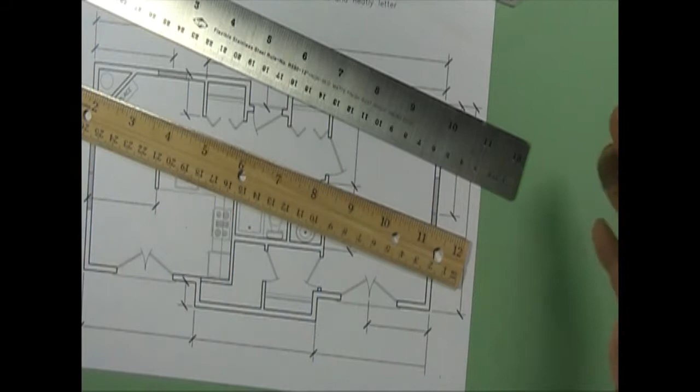Okay, this video is going to be an introduction to the fractional ruler and how to read that. There will be some resources in Blackboard for you to use to practice and get a little deeper understanding that you can read through. But what I've got here in front of me is a typical wood ruler that's got inches on one side and millimeters on the other side.

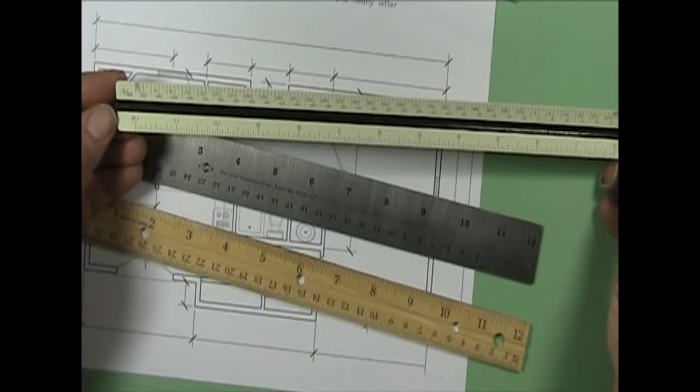Then I have a steel rule, which I'll talk about again in a little bit. It's inches and millimeters. I've got a couple of others over here. This one is an architectural scale, and I'll explain that in the architectural scale video, but it's a scale, not a ruler. And then here I have an engineer scale or a decimal scale.

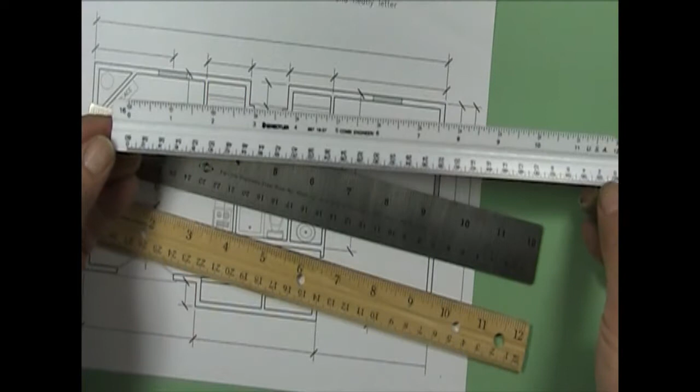And then there's a combination engineering scale, which has fractions of an inch, a couple of engineer scales, a couple of architectural scales, and sizes, you know, full size and half size. So that's some of the things that are available. I don't know which one will show it best. I think the wood is probably going to show the best, but as you can see, a typical ruler is divided into 12 inches. Okay, let me zoom in a little bit.

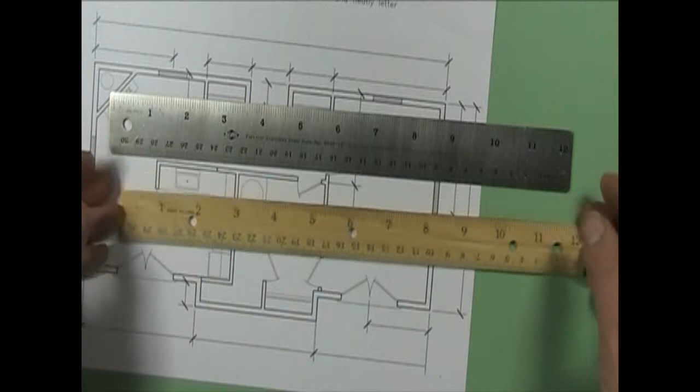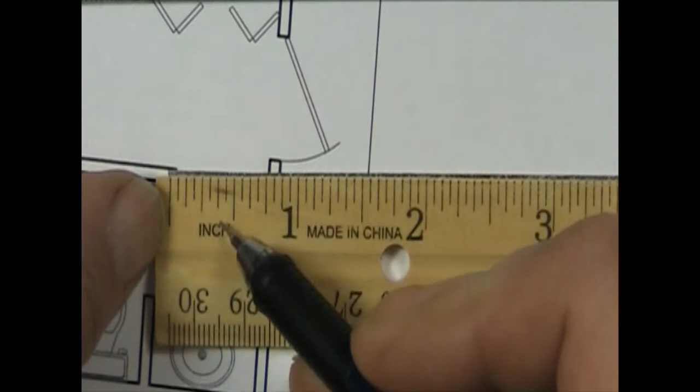All right, so you can see the wood ruler here. The line is the 0 point. Then we've got the 1 inch here, and it is divided in half, and then divided in fourths. Again, notice the length of the lines. And then the fourths are divided into eighths, and then the smallest unit is 1/16 inch. So you can count the tick marks by 16ths. 16 would get you to 1 inch.

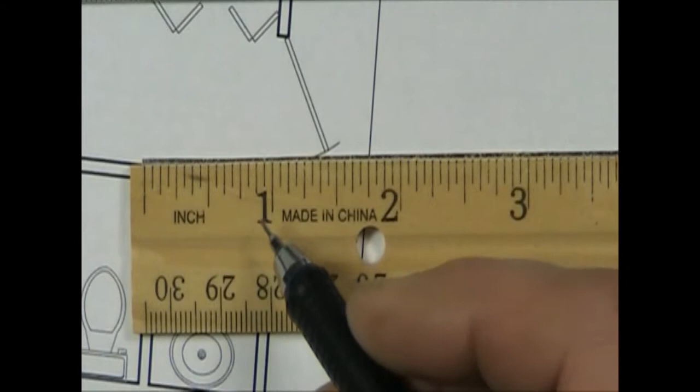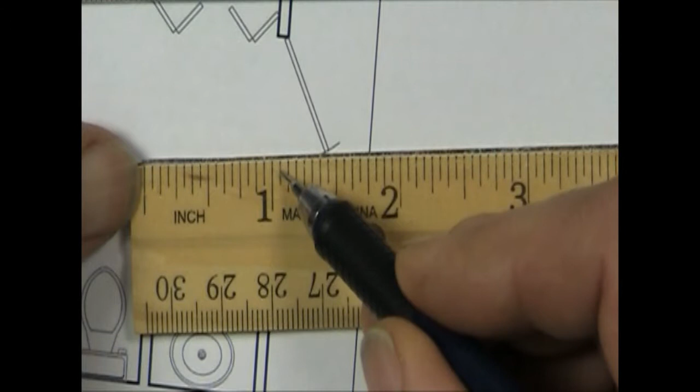But anytime you measure or record or write or dimension something, you always want to simplify your fraction down to the lowest denominator. So this measurement would be a half inch. It's 8/16, but we would write it as 1/2. Once we go beyond the 1 inch, then we would say 1 and 1/16, or 1 and 1/8. Now, most of the rulers you'll see will be divided into 16ths.

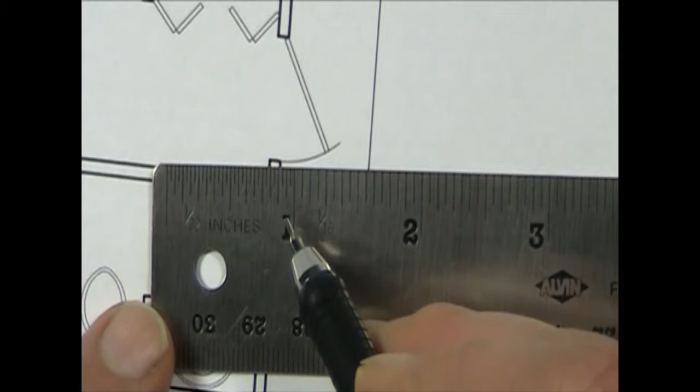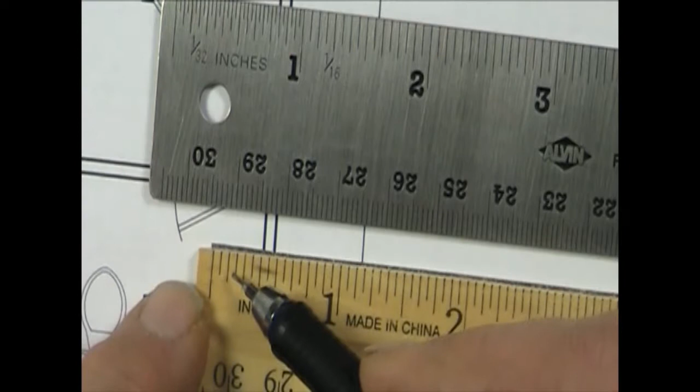The steel rule is actually divided into 32nds, and it will say that on the end. Everything else is in 16ths, but the first inch and the last inch on the other end are divided into 32nds, and some are even divided into 64ths. See if you can see that right there. So you can measure accurately with that. With a 16th, 1/16 is as accurate as you can measure. Anything less than that, a 32nd, you're having to guess or estimate.

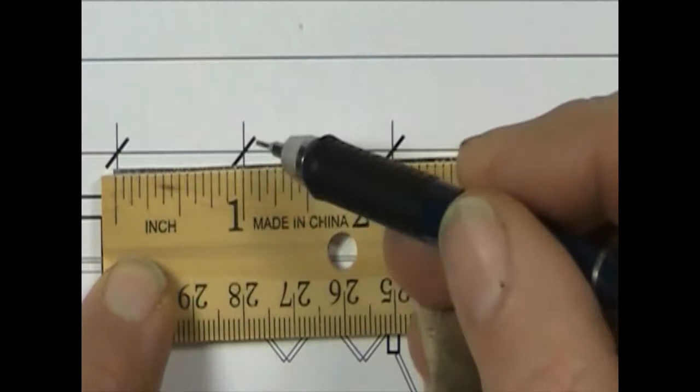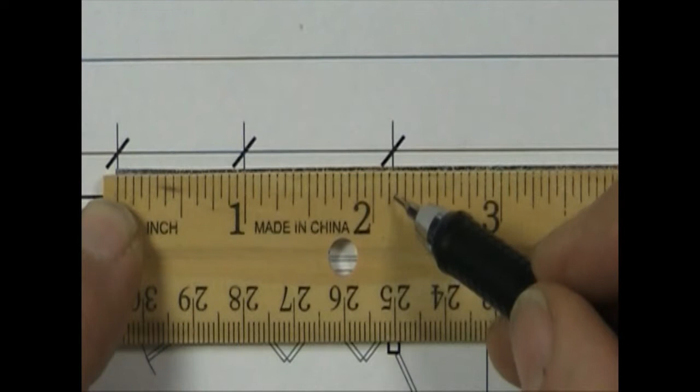All right, so just to demonstrate how some of these are going to work, I've got a little floor plan here, and I'm just going to measure it in inches. So I would line my 0 up with the mark and read out, and that reads 1 inch. If I were to measure from this point down to here, now I'm reading 2, and it looks like a little bit over 1/8 of an inch. So we could round that, depending on which way we're rounding, to 2 and 1/8.

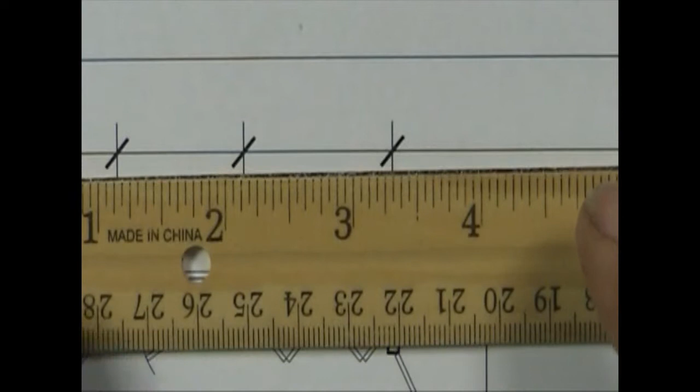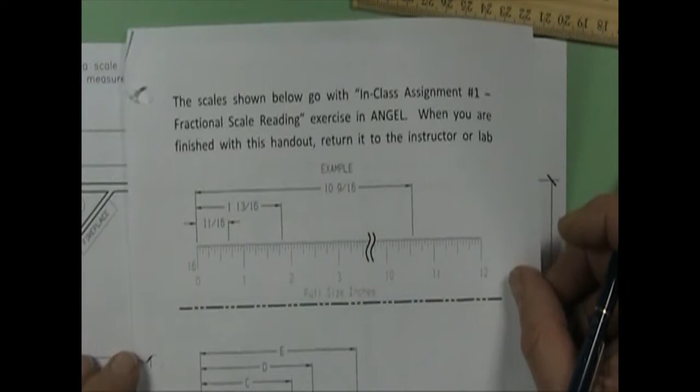If I pull back to this one, well, you can't see my 0 mark over there, but then I read this, and now we're looking at 3 and 1, 2, 3, 4, 5/16. Okay, now in the lab, once you've practiced, you're going to get this handout sheet, and this will be tied to Blackboard, even though it says Angel up here. You'll enter your answers in Blackboard, and the ruler at the top is not to scale. So you can't measure these with a ruler, because the printing is a smaller scale, so it's not life size. You just have to read that.

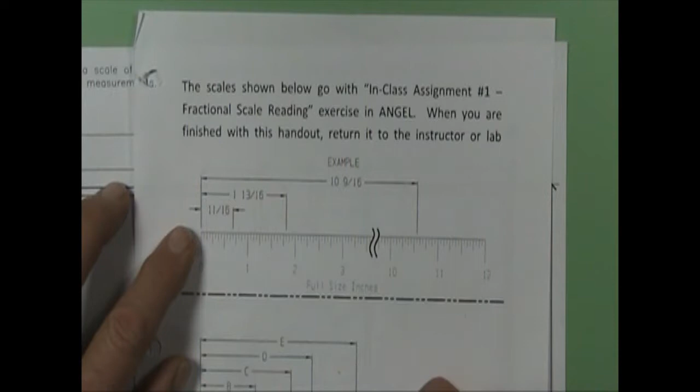So the example here is 11/16. If you were to count the tick marks, 1, 2, 3, 4, 5, 6, 11. So that would be your answer. This one, 1 and 13/16. And I'll go ahead and tell you, this one here is not on a 16th, it's on an 1/8 mark. And if you do not simplify your answer to 1/8, then your answer will be incorrect.

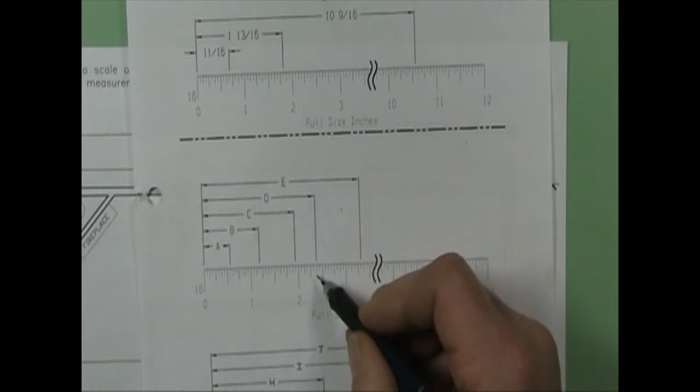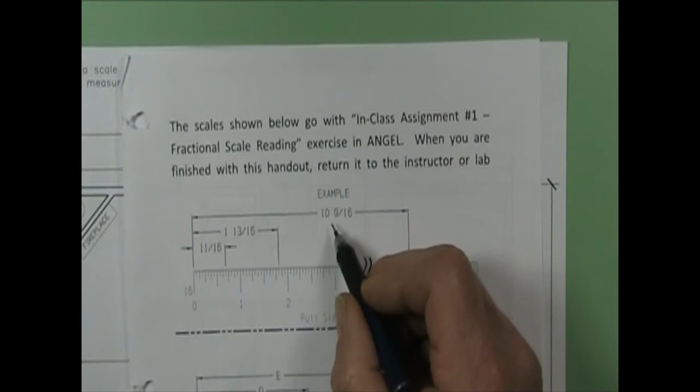And when you put your answers into the quiz, there'll be instructions in the quiz to tell you how to do that. Or it may be multiple choice. I don't remember, I'll have to look at it and see. But anyway, this is the sheet that you'll use to complete the in-class assignment. Like I said at the beginning, there are a couple of web resources in ANGEL for you to look at. And I'll put a link to a ruler game where you can actually practice and build your skills with that.